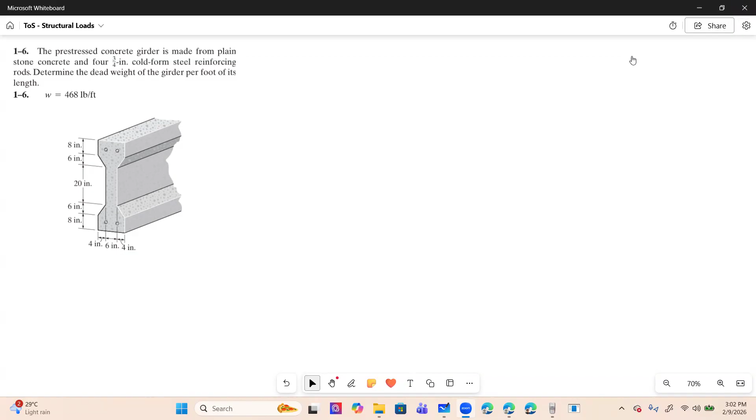Okay, for our next problem, involving the topic of structural loads. This one's still from Hibbeler. So, the pre-stressed concrete girder is made from plain stone concrete.

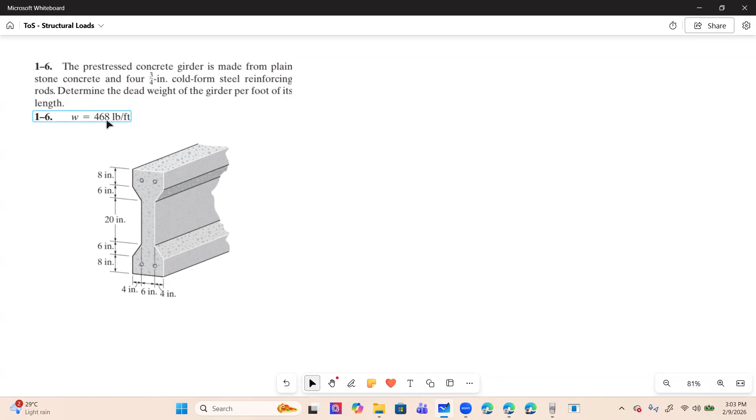This one's an introduction to concrete design. There are 4 3/4 inch cold form steel reinforcing rods. So determine the dead weight of the girder per foot of its length. This answer is from the inside back cover of the book.

Let's work this out. Again, for dead load, to get the dead weight of the girder per foot, we need to find what's acting at the centroid, but along the length. So our answer should be in pounds per foot, and that will be the W total.

How do we solve that? We just have to multiply the unit weight by the area. Just compute for the area, that's it.

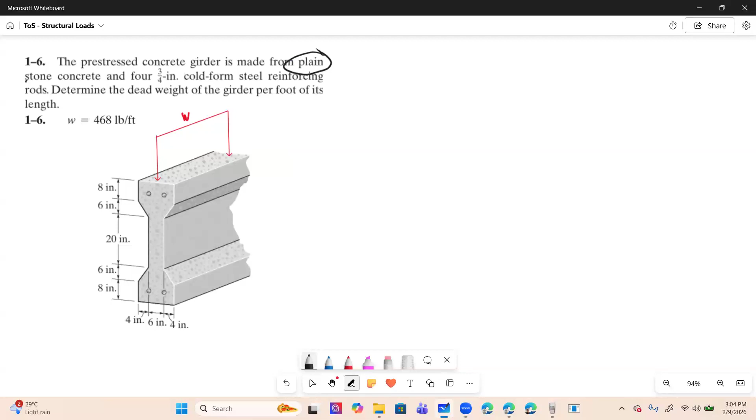Where's the information? Again, the pre-stressed concrete girder is made from plain stone concrete, same as before. We'll find that here again. Plain stone concrete, so this time we'll be using this value.

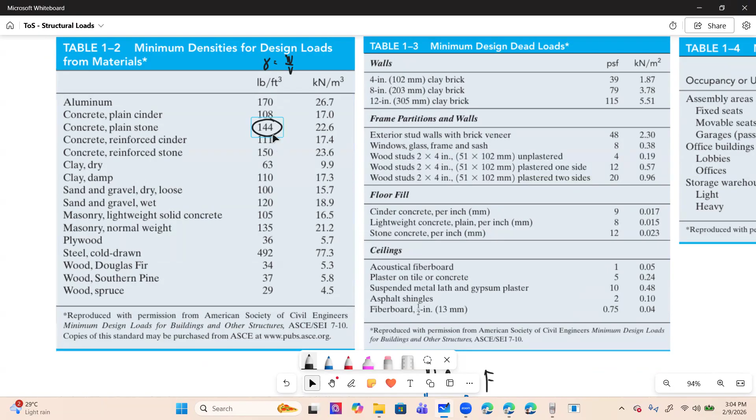It's already in pounds per cubic foot, because we'll just multiply it by the area. No need for the thickness unlike before, where we multiplied by thickness to get 12 pounds per square foot.

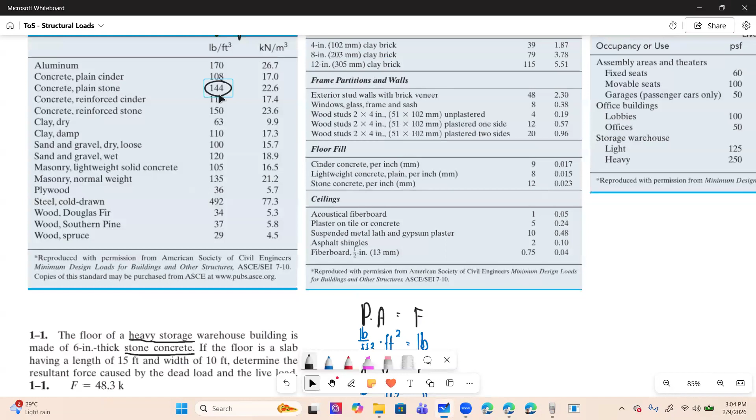So in this case, the unit weight of the plain stone concrete - this is another given. The unit weight of concrete is 144 pounds per cubic foot.

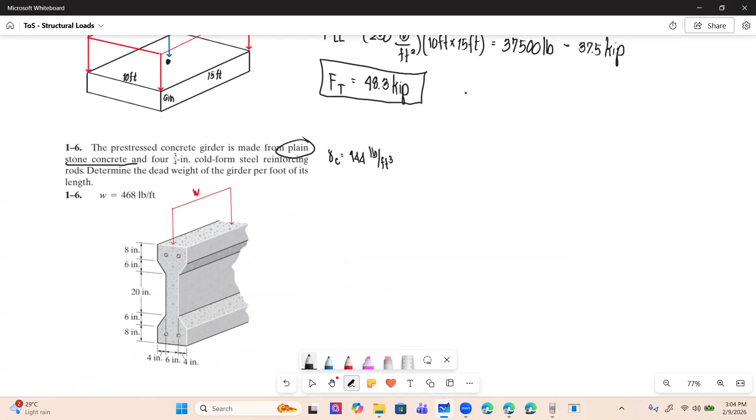And one more is the cold form steel reinforcing rods. We multiply that by its unit weight too. Where do we find that? We have aluminum, concrete, clay, sand, cast iron... I guess this is it - cold-drawn steel, that's 492 pounds per cubic foot.

This is Table 1-2 for materials, derived from materials, for the structure, whatever was used.

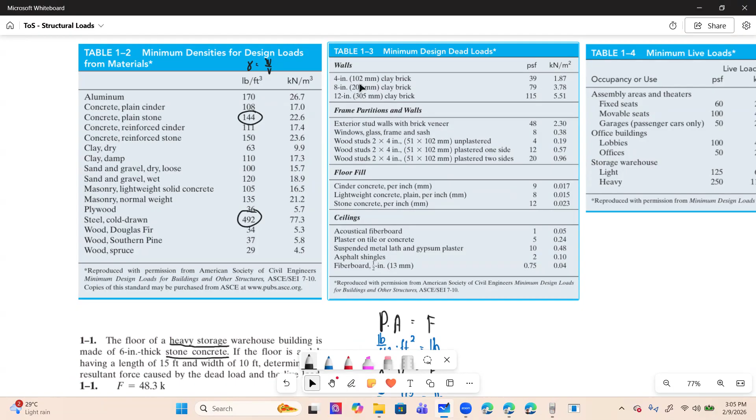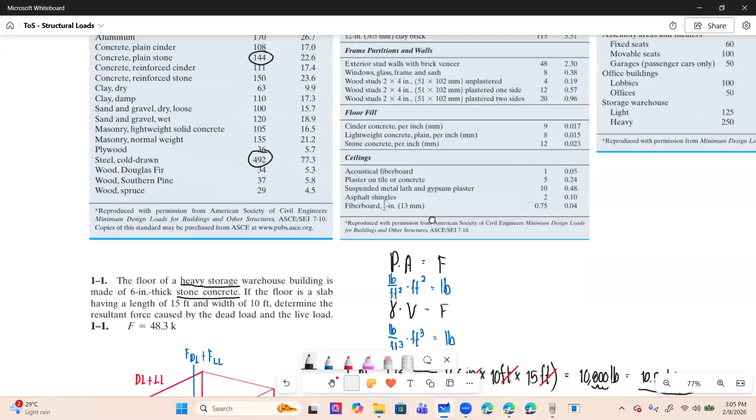This one is again for live load, but there's no live load in this case. So you'll just use this: 492 pounds per cubic foot for the steel, another constant.

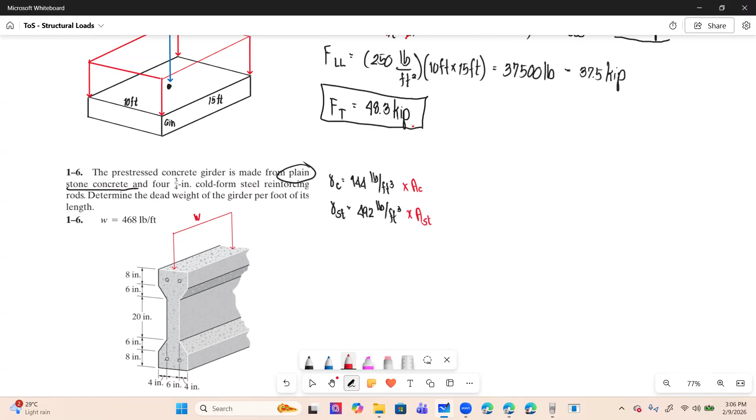All we have to do is multiply that by area, then we'll have the uniformly distributed load. Multiply by the area of concrete and multiply by the area of steel. Then add them together.

Okay, so for the area of concrete, let's number this. The area of concrete is this whole thing, but take note, we only consider the concrete, so we'll subtract the steel. That's the steel there - 4, right? It says 4 3/4 inches.

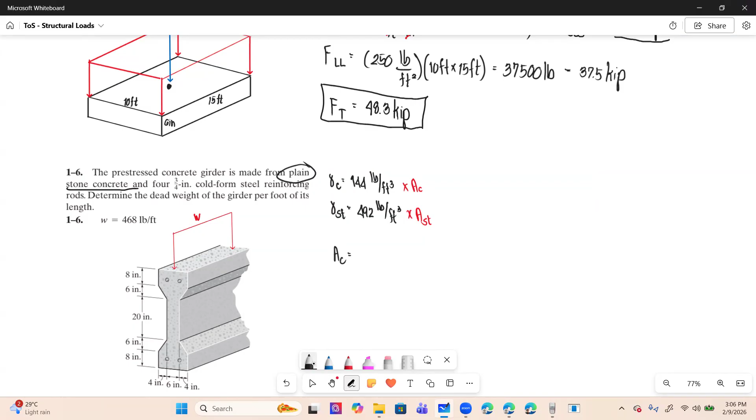We will have this rectangle, let's name it area 1. Then this trapezoid - let's call it area 2. And then this another rectangle for area 3.

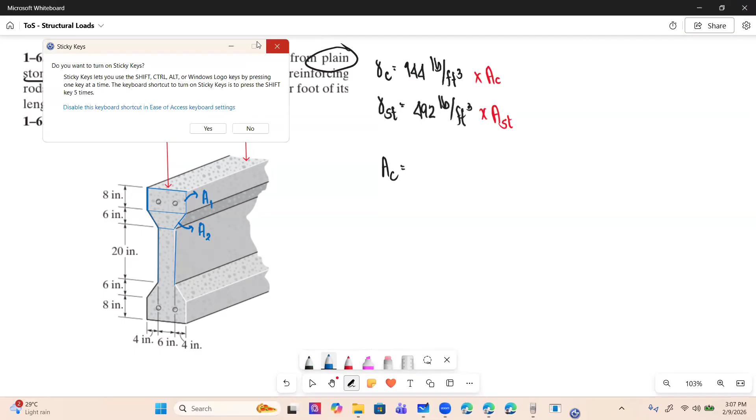Then of course it repeats - this is also area 2, and also area 1 at the bottom, because it's symmetrical, identical shapes. So that means two of area 1, two of area 2, one area 3.

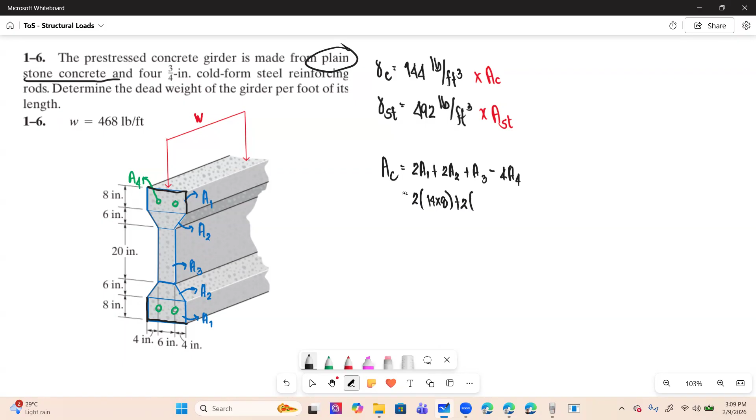Plus two of area 2. Area 2 is a trapezoid, so the formula for the area of a trapezoid is 1/2 times base 1 plus base 2, times height - or I'll just do height over 2 times the sum of the bases.

The height is 6, and it matches below, also 6. So I'll just use 6 over 2 times the sum of the bases - base 1, which is just 14, that's 6 plus 4 plus 4. And base 2 is this one, which is just 6. So it's 14 plus 6.

Twice area 1 plus twice area 2 plus area 3. Area 3 is just another rectangle, so this is still 6. This is the length, 20.

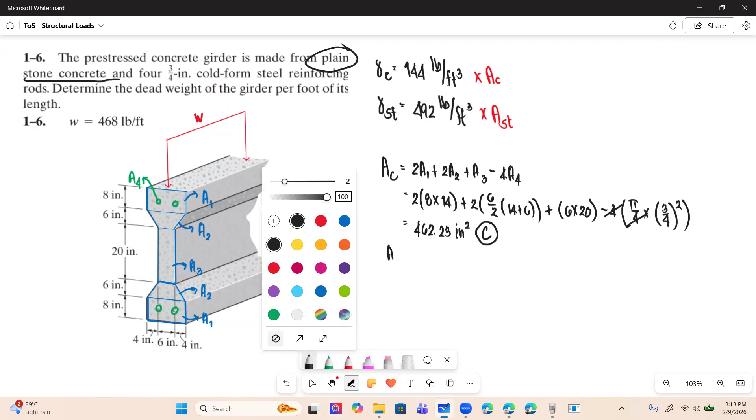So our area of steel is just 4, pi over 4. Let me modify this, just the bottom part, pi over 4 of pi over 4, so that's just pi times diameter squared. So that is 1.767.

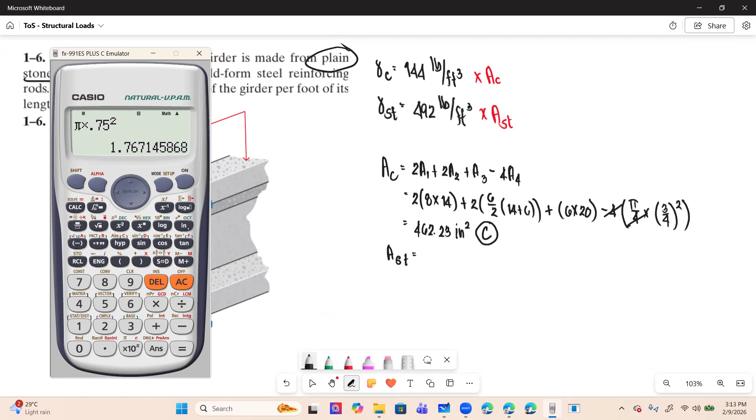1.767 squared inches. Let's store that in B, for bakal (steel). So our values are now stored, for the dead weight.

Now we can total it. For the total dead weight, just W, since there's no live load I won't use a subscript. Understood? So the total is unit weight of concrete times area of concrete, plus unit weight of steel times area of steel.

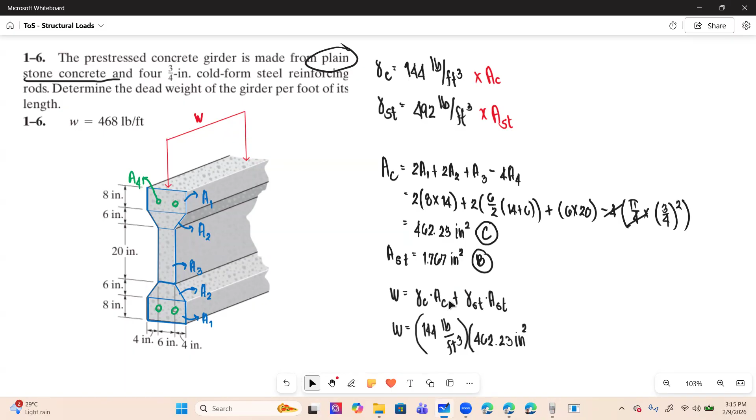But the units are different, so let's recompute. Unit weight of concrete is 144 pounds per cubic foot. Multiply by area of concrete, which is 462.23 squared inches. Let's convert this now, make inches into feet. We know that 12 inches is 1 foot by conversion, and since it's squared, we square that too.

Plus unit weight of steel, 492 pounds per cubic foot. Multiply by its area, 1.767 inches squared, same as before. I'll simplify since both are in inches.

Multiply by the conversion factor. The cubic part, since it's squared inch, cancels, feet squared cancels, leaving pounds per foot. Same on the other side, feet squared canceled and squared inch canceled, since you distribute the square inward. So this will be your final answer.

It's stored already, 462.23 is stored in C, and this one is stored in B, for bakal. So the uniformly distributed load will be 144 times C plus 492 times B, oh wait I forgot the conversion, we still need to divide by 12 squared.

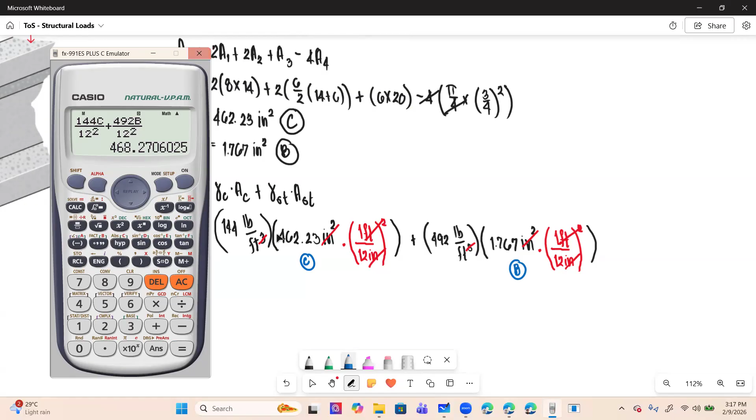Then we divide by 12 squared, or we can add them first then divide by 12 squared, same result. That gives 468.27.

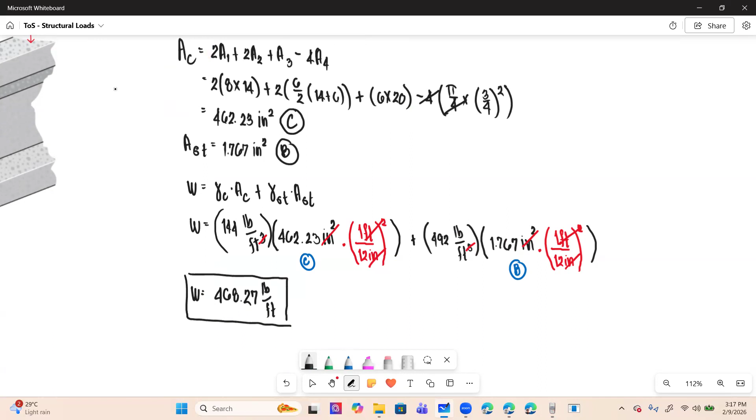There we go, my final answer is 468.27 pounds per foot, to be exact. I guess that's it for this problem. Hope you learned something, thank you.